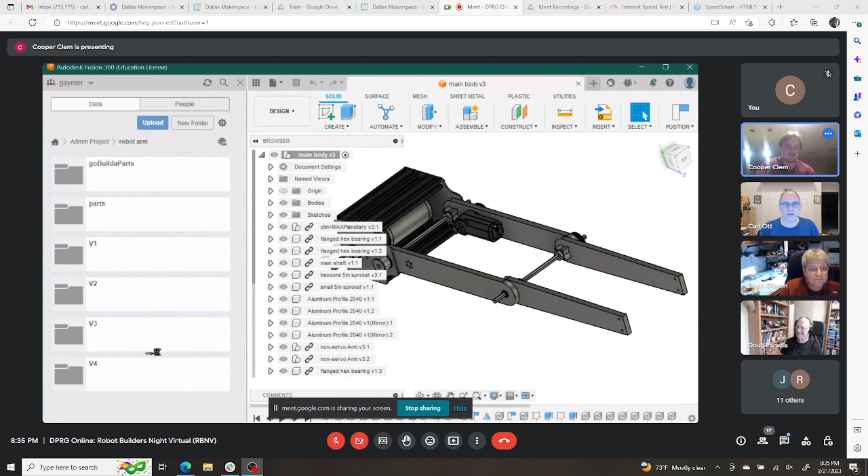So you haven't seen me in a while, or at least some of y'all haven't seen me in a while. Last time I presented independently from Iron Rain, I presented this, I think, or maybe it was the one before even. I've been working at this for a while. So basically just for...

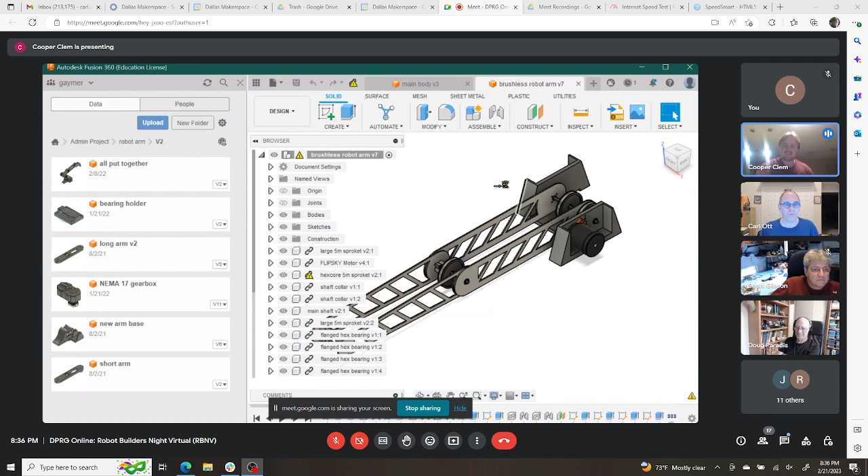God, as long as I've been into robotics, I wanted to make a robotic arm, something I could have at my desk as, I used to call it a research tool. Now I know it's just a toy. But it would be something I could use as a portfolio piece when trying to get into industry.

So I CADed up a bunch of different ideas for robotic arms. I started very basically with just these NEMA 17, throwaway motors that I got from somebody's old maker bot. That was before I learned about torque, and how you have to have so many teeth mesh with a toothed gear with belts, before there's slippage and whatnot.

In any case, I've tried at this a couple times. I can't say I've ever built one of these. It's always a matter of I get a really nice design going, and then the funding issue hits. Here, this is what I was trying to open earlier.

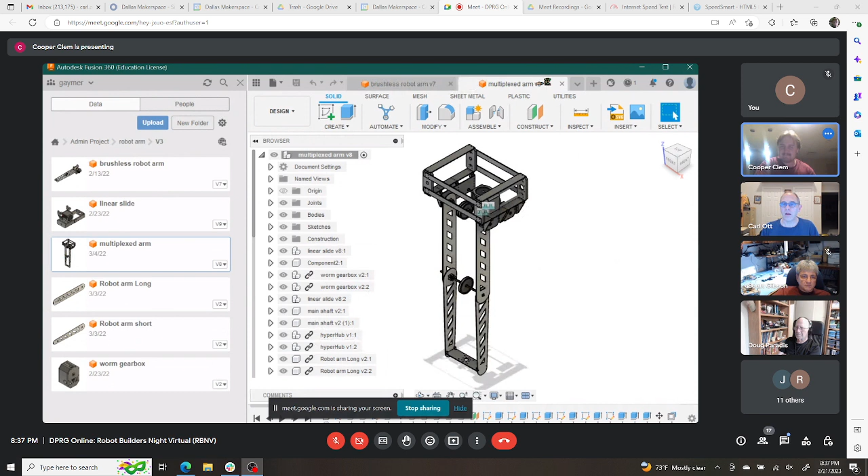So this was my design before my previous design. I'm not going to move ahead with it, just because I don't know if it really fits my goals with this type of project, but I'd like to briefly go over it because I think it's cool. So I was trying to design this one with cost effectiveness in mind, using mechanical multiplexing to reduce the number of motors I need for the arm.

I don't know if this is really particularly used in any other types of industrial robots. But in theory, you would have this linear slide with a NEMA 17 style motor controlling a linear actuator, or the barbershop pole kind of thing.

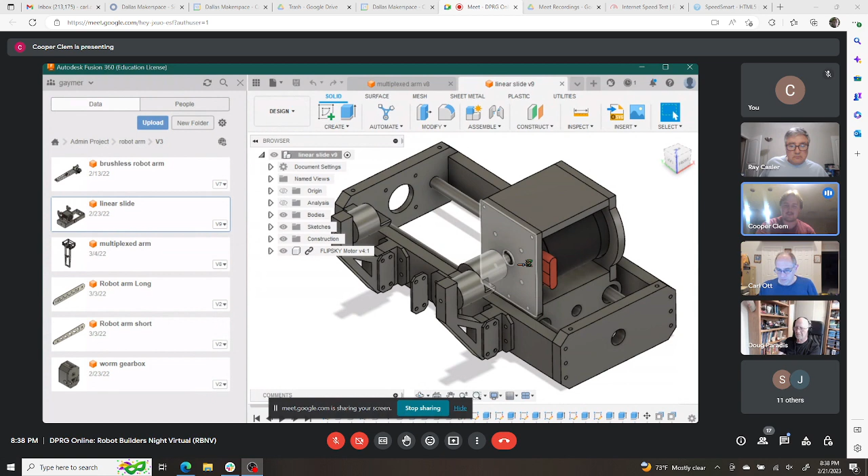It would push this like on a screw. It would push this whole thing back and forth, where it would interface with these little motor interfaces, and it would interface with this one brushless motor. So you'd only need one brushless motor to drive both segments, well, one brushless motor and the NEMA 17 motor.

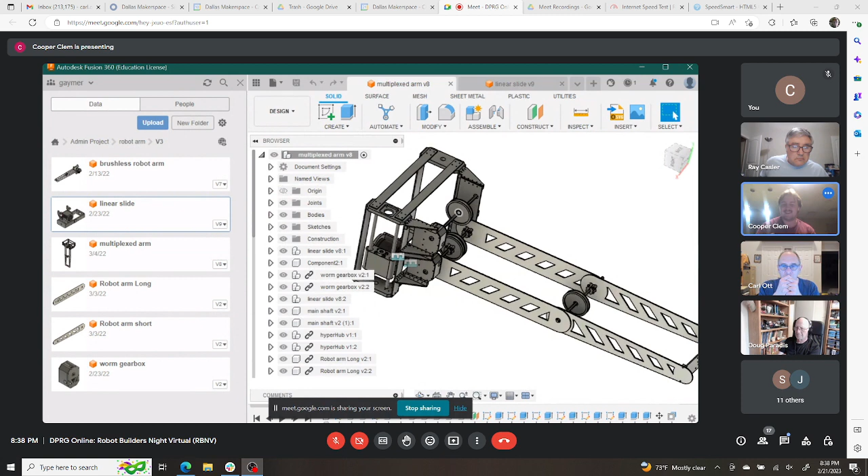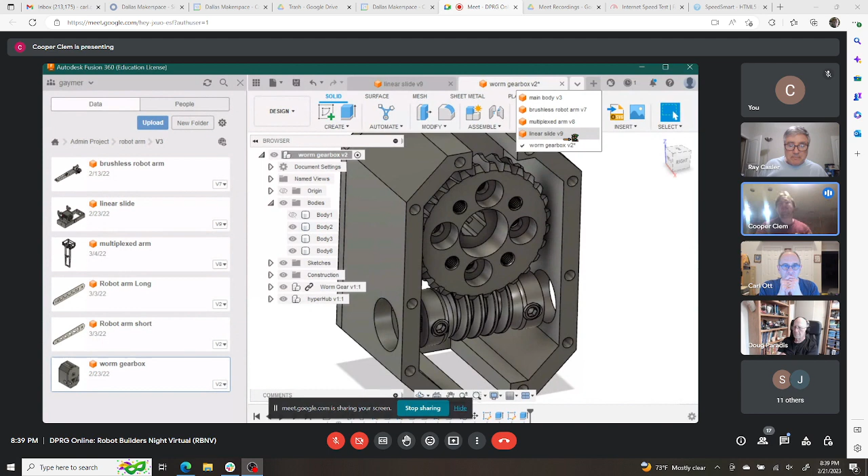Those would go into worm tooth gearboxes. If you have tension on something and you don't have it held by a worm and worm gear mechanism, it'd just fall down. But with this, since it's not back drivable, it would in theory keep up the entire body.

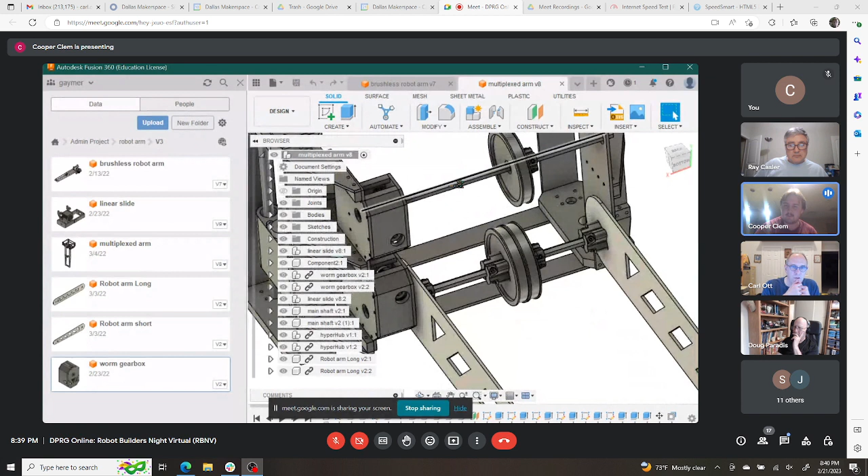The thought was this was all maybe 3/16 inch aluminum, and it would be using a bunch of off the shelf parts, like goBILDA stock axles. This was the part that I found maybe the most interesting about this design.

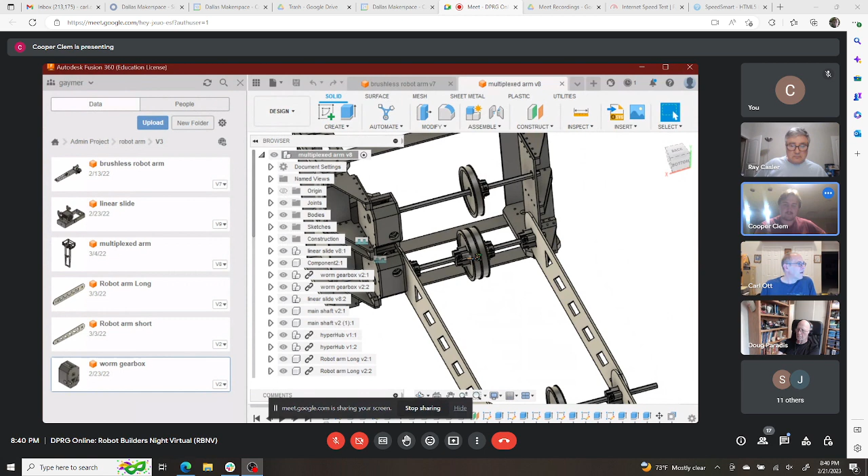I'm curious to see if anybody's tried this, with trying to save costs. This axis right here drives both segments, so the motor would interface with this gearbox, which directly went into this axle, which drove this first segment. This model's a little off, there shouldn't be these collets here, what are they called, shaft couplers?

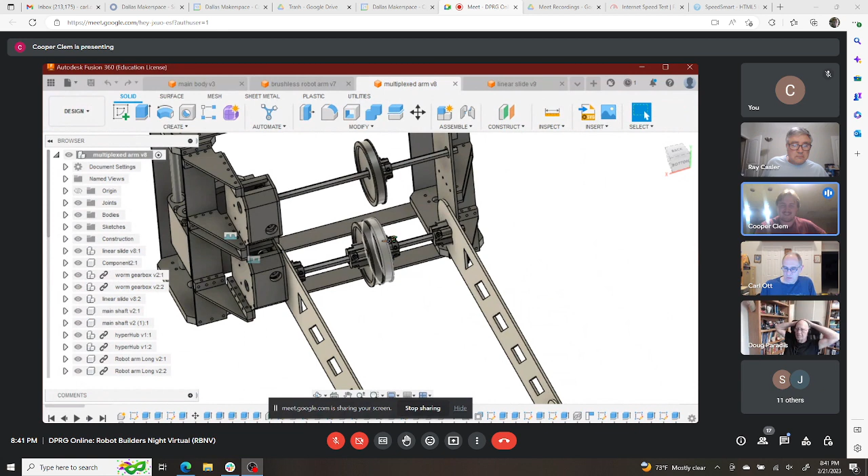There should be bearings in these, because the idea is that the motor would multiplex up to this other gearbox. This would drive this shaft. There would be a belt between this sprocket and this sprocket, and then these would be mechanically coupled such that there would be a belt that could run from there to there. So when you spun this, it would spin this, if that makes any sense.

Way back in the 1980s, Radio Shack came out with a toy robotic arm that had one motor in it and a whole bunch of gears. When you pressed the levers, it would move the gears around to engage different parts of the arm to move different parts, but there was only one motor in it. I think I've seen James Bruton recreate something like that, but I believe he used clutches. Or maybe it was multiplexed, but the multiplexer was just that lever, where you'd engage different gears based on the lever position. It's been a while since I saw that, but I know exactly what you're talking about, reminiscent of older toys.

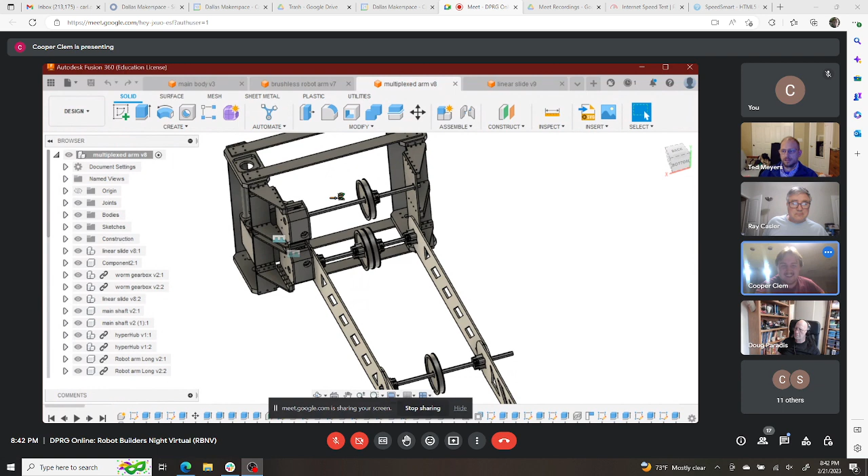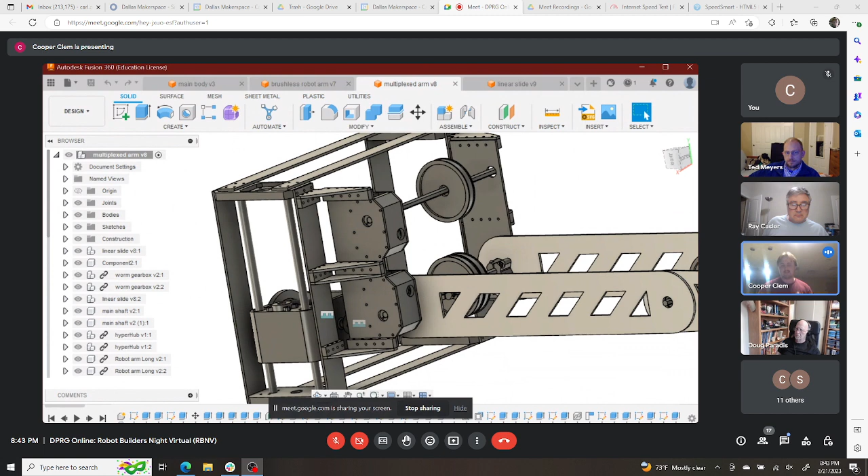This kind of looks, at least to me, like an Erector set a little bit. One of the things I was curious about, working on my modeling, is that I fall into the trap of using plate and just doing that whole thing, because in my mind I have a lot of experience modeling for 3D printers and CNCs, or 2.5D CNCs. But I don't quite know how to get out of that headspace when modeling for something like this. I had a really tough time figuring out how to connect these perpendicular plates that connected to the gearbox and the rest of the chassis.

Would anybody know how to achieve maybe a more, not organic, but something else? I understand this is maybe not the best design, but I couldn't picture another one.

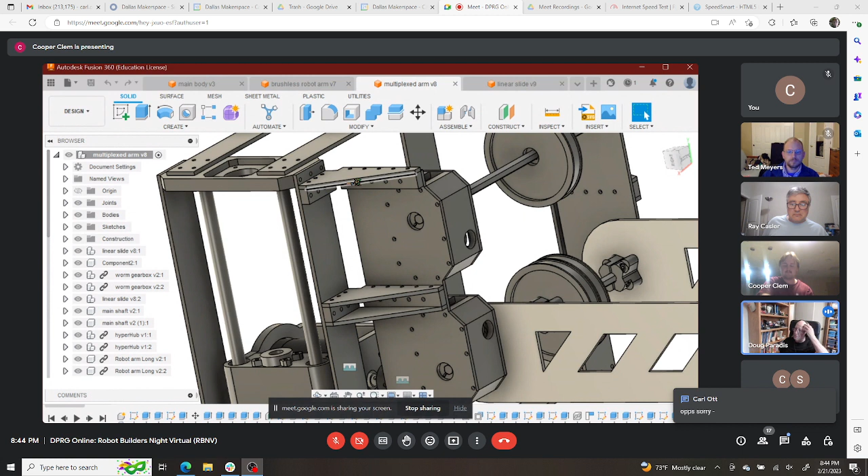Actually, I think your design's pretty good in that sense. Using plates is not a bad idea. To make it more organic, you can add some curves to it and some bevels and whatever. But if you were actually trying to make it inexpensively, you would want to do plates. Now, how do you create those combinations? Well, in the industry, one possible way they would do that is spot welding or something like that, and that's really not out of reach of the hobbyist. Weldments can be really cool. So that's one approach.

Eventually one of these days I will buckle down and get a welder and an angle grinder. But for right now, I was just working with Mr. V's CNC and my 3D printer at home.

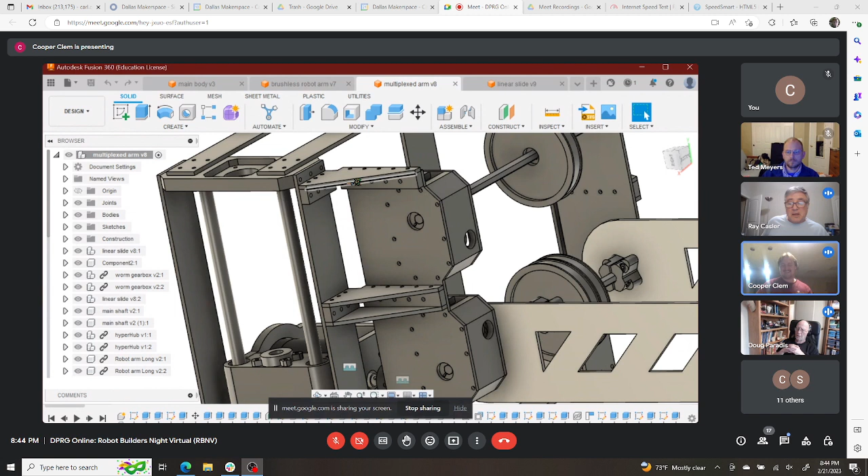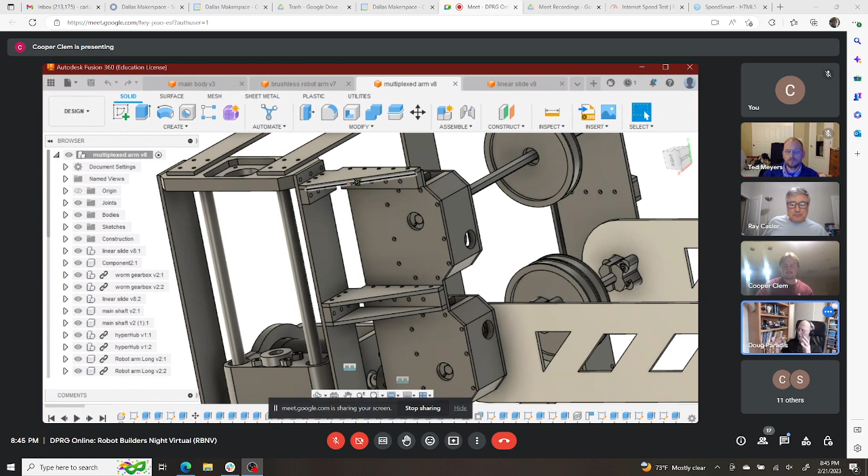The thing about welding though, especially if you're welding aluminum, you can put too much heat into it and warp pieces. So from a hobbyist point of view, the cheapest way to do this, if you're going to use aluminum, is to use that low temperature aluminum rod they have. It's a combination of zinc and aluminum or something, usually about 700 degrees. It's really like a brazing rod. You warm this up and let it flow into it, and it's stronger than the material.

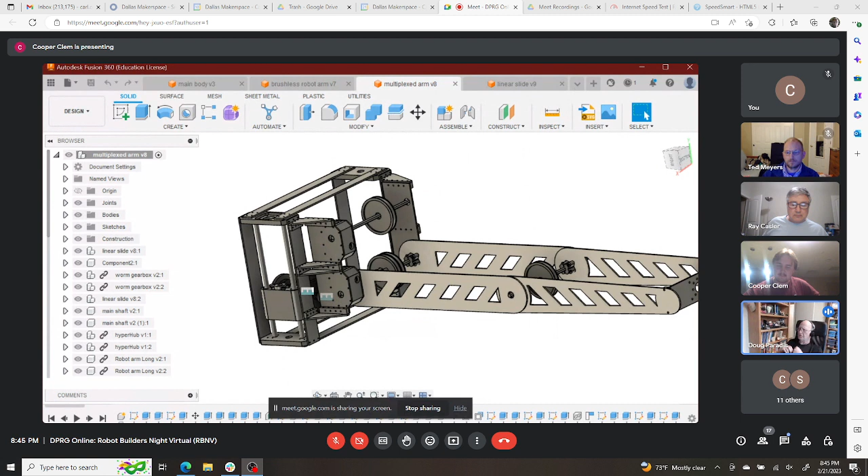I think you'd find it interesting. You might go take a look at, what do they call that? Sometimes they call it low temperature welding of aluminum, but it's not welding. It's really, like Ray said, a brazing process. It's also a soldering process, depending on how you want to call it.

What you do is you take your two pieces of metal and warm them up, and then you take your filler rod, and while it's warm, you let it flow. When it hits a certain temperature, it'll flow into the crack. You can go to Harbor Freight and get you a pack of them for $18, and you can probably do this on Amazon even cheaper, but you have to be careful with Amazon.

There's somewhere on YouTube, a person who has evaluated the various ones, and he actually liked one a lot better. He liked the Holbert brand of this low temperature aluminum, whatever you want to call it, brazing rod. But within his top three was Harbor Freight, which actually did surprisingly well with all of the tests.

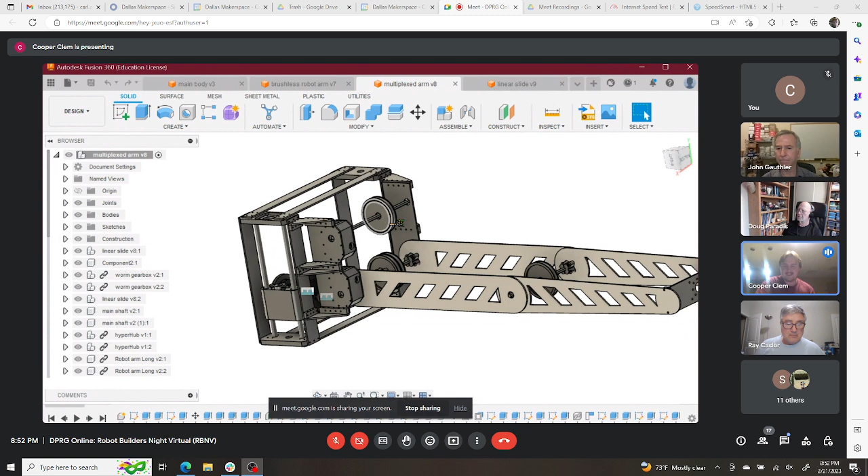I have a quick Fusion 360 related question. Looks like you're fairly experienced with Fusion 360 - what do you use to create your gears? Oh yeah, my gears - here they are just cylinders.

For the worm gearbox, I didn't CAD these. You downloaded models for those, right? Yeah, for these. However, I do create gears every once in a while, and there's this utility - I don't have it downloaded, but there's a pretty standard gear generator. Is it GF gear generator? Yeah, it's a little clunky, but I've found good use out of it when I do use it.

That's what I have. I was wondering if there was something better, because I have the same comment - it's a little clunky to use. I think there are probably some better extensions out there, but they might be commercial grade. I'm just surprised the basic Fusion 360 package doesn't come with a gear generator included. Right? Yeah, that's all I complain about with Fusion 360.

Is that a standard thing in SolidWorks? I don't know, I've never used SolidWorks. I see - I need to learn how to use that too.

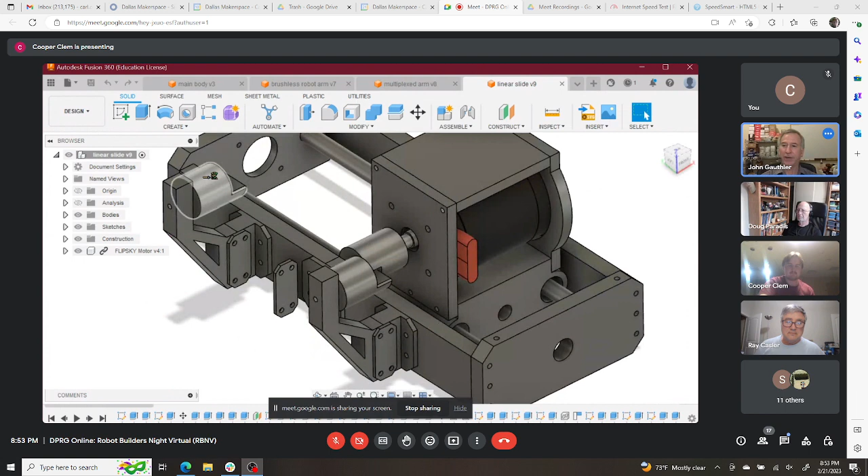I do have one other complaint about Fusion 360 - they give you the capability to generate threads, but if there's any size thread that's not included in their standard set, you can do a little editing on the XML file that specifies the threads. I've done it, I've generated different sizes of threads, but every time you upgrade Fusion 360, you have to go find the folder that XML file is in and manually move it to the new installed folders. Really? Huh, it's a pain in the ass. Yeah, I bet.

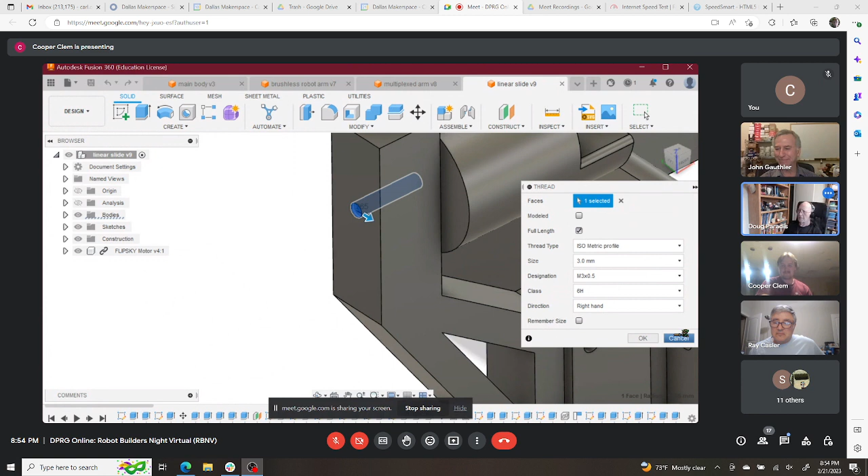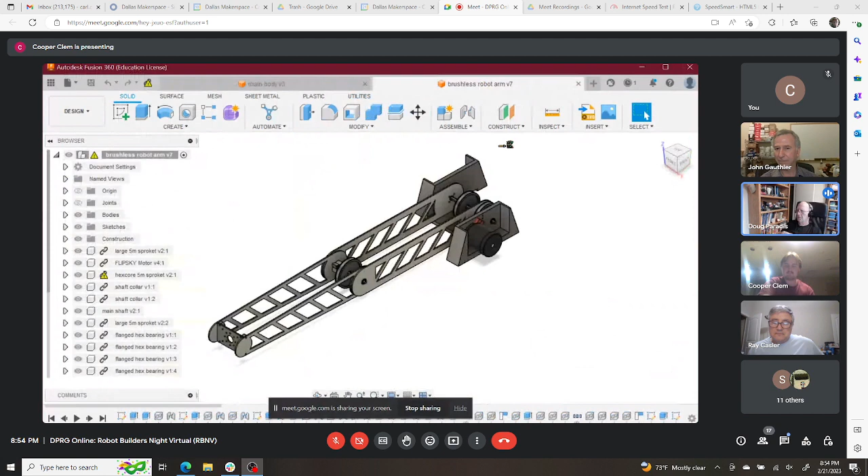I don't know, John, if this is of any interest, but if you were doing it on a 3D printer, there's OpenSCAD - there's a gear library that'll do any type of gear you want. You just specify what type of gear and the different sizes, and it will create a file suitable for 3D printing.

I'm not sure what other file formats it does, because I don't have any other way to make it. But I've still preferred something I can integrate into my model in Fusion 360 rather than just an STL file. Yeah, that would be useful for some circumstances. I'm sure there are probably independent gear generator programs that would generate a step file, but I don't know any off the top of my head.

Another source is RS - they're sort of like a European parts company, and almost every one of their vendors includes 3D step models of their parts if you want to download it. The same is true of McMaster-Carr - they have 3D models for every fastener they sell, and I've used McMaster-Carr's, imported their models into Fusion 360.

And then I guess I got one final thing just to wrap it up, because I've been going on for a little bit here. But this is kind of my newest design. Hopefully this will be the last one, as I've recently got a job that I think is going to actually allow me to fund this thing.

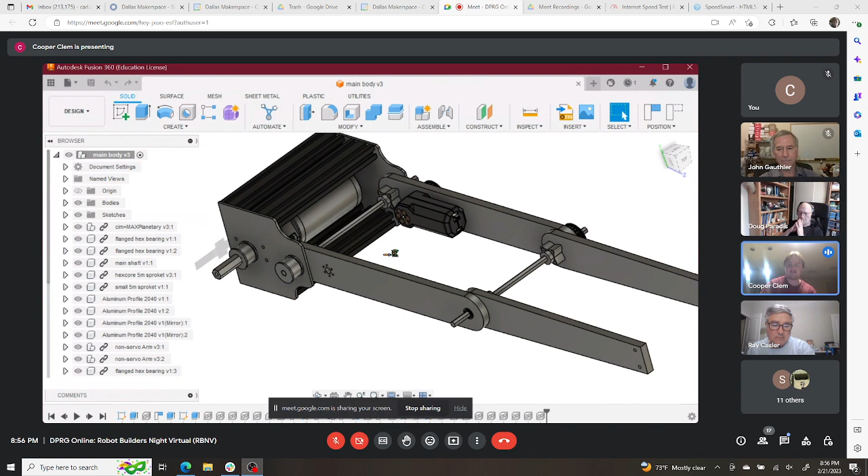I've already bought the motors, so that's usually the largest hiccup when doing all this kind of stuff. And the model's not finished, but it's kind of getting there. You can kind of see where I'm going with this. It's maybe a little bit more simple of a design. These are 3D printed parts, and I'm using just a motor on the actual thing, connected by belts and whatnot.

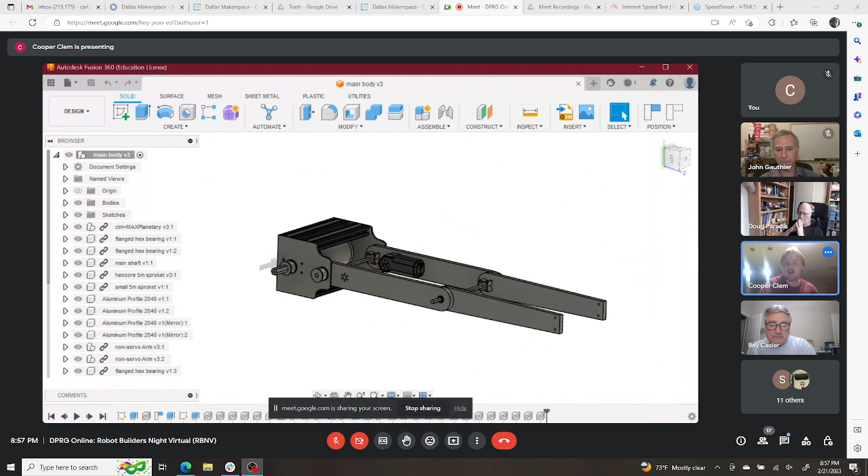The one thing I was going to ask was just that - so I guess I've got 2 questions. This whole thing, I hope to mount on my wall in this orientation where this side over here is mounted to the wall. Though I do hope to mount that on a linear kind of system in which I can move it back and forth, so the work envelope of the arm would be my whole desk.

Because the final goal for this arm - I've had problems with like, oh, what should I make it do, you know, whole 9 yards - the final goal for this arm is just to be a work light, a fancy work light. But the fact is it's going to be running off of, hopefully, a Raspberry Pi or a Rock, whatchamacallit, running ROS, whole 9 yards. Showing my capabilities rather. So it is still a portfolio piece.

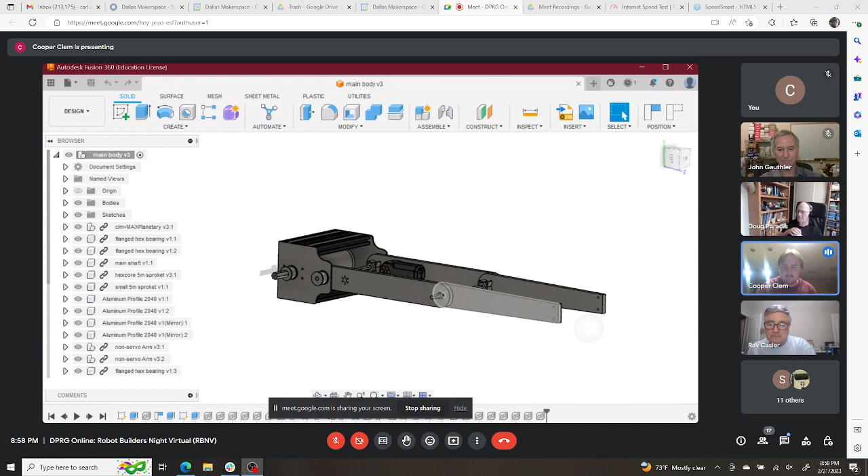However, I just can't for the life of me think of what a good linear stage for this would look like on the scales that it's going to be. For any context, I think that end to end, the full length of the arm is somewhere in the neighborhood of about 0.6 meters. And this thing's going to be pretty heavy, so I'm just not sure about how I should go about that linear carriage.

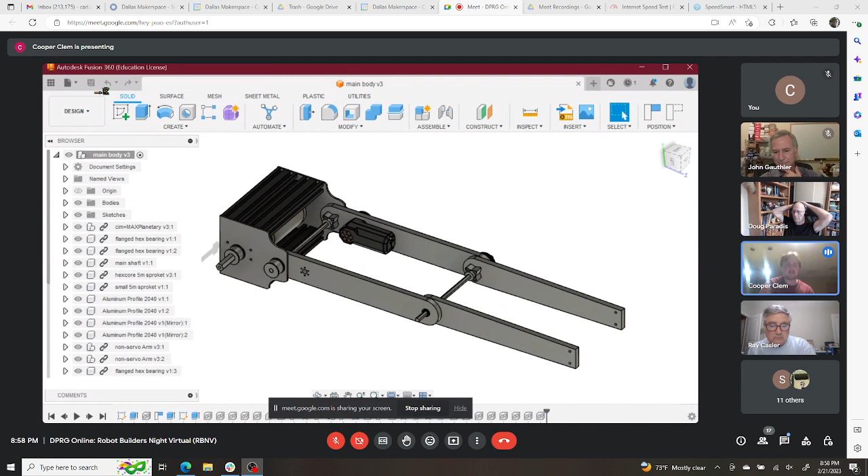And then the other question I had was just on this front end, and I haven't modeled this fully either. Its work envelope would be sufficient-ish if I just had it go from, on that linear carriage, one end to the other. But in the face of making it more complicated, I would really like to be able to do some nice inverse kinematic demonstrations on this thing.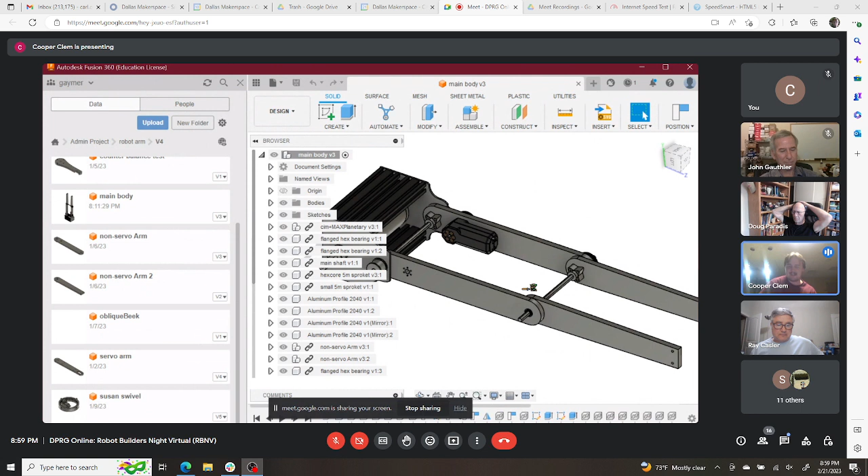For that, I kind of want a couple more axes to actually fully demonstrate that whole thing. And I was thinking, because a work light, I want to be able to point in any which way generally, right? I was thinking about for the ends, either using a parallel swivel joint or an oblique swivel joint, if anybody's got other suggestions. I don't know, I can't wrap my head around the oblique swivel joint, it's really its own beast.

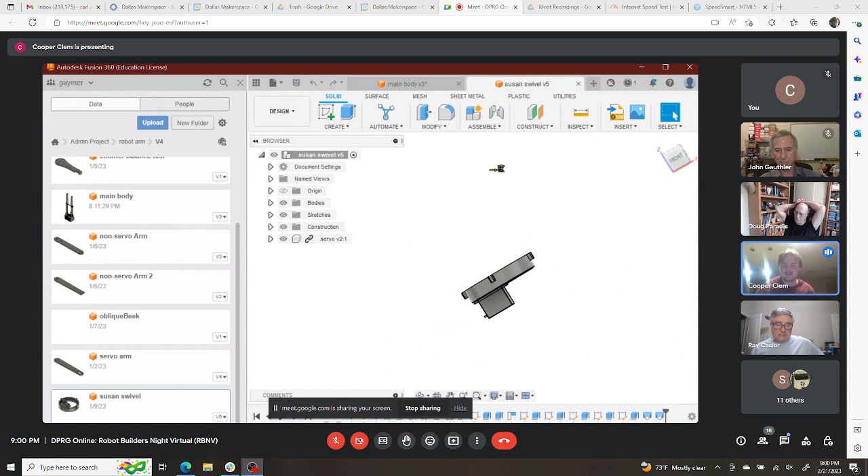This is just about as far as I've gotten - it's just a servo-based Lazy Susan kind of thing that's self-contained, so that in theory you could stack one like this and then another up here on this angle, and then they rotate, and that's that whole thing. But I just can't quite wrap my head around it. In any case, I'm just asking - is there any other kind of system that y'all might recommend that would be more effective at pivoting the end effector more simply, maybe?

Not that I would know. Probably Kareem would be the best person I can recommend. Fair enough, and you probably already talked to him about that. I actually haven't, I need to go back and talk with him.

Well, if you're going to do something really out there, you could do one of those snake robots, where you have a bunch of ball joints one on the other, and then a bunch of pulleys to different joints. Depending on how much you pull the cable, you can move it around like a snake arm.

Oh yeah, I think I've seen those. That would be different, interesting. Don't let anybody diss your design for being an overly complicated work light, that's just the fun of it. Sure, you can probably buy something off the shelf that does what you want, but it's the fun of building something unique. And if you do a nice enough job, it'll get shown on My Modern Met or one of those websites, Yanko Design, and then you can sell it for a couple thousand dollars.

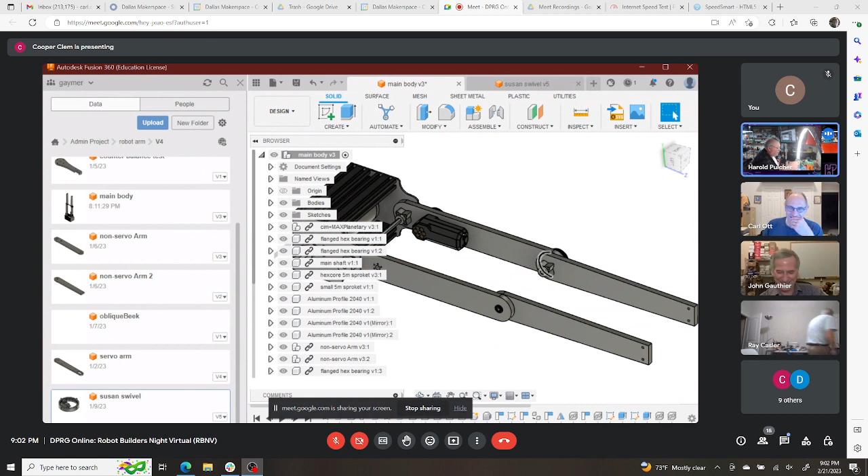On the worm and the worm gear, if the ratio is low, the worm gear can rotate the worm. So on these motors, as the worm turns, without much force I can still rotate the wheel there, and that's driving the worm backwards. So I don't know if you can see that or not, but I can rotate that wheel.

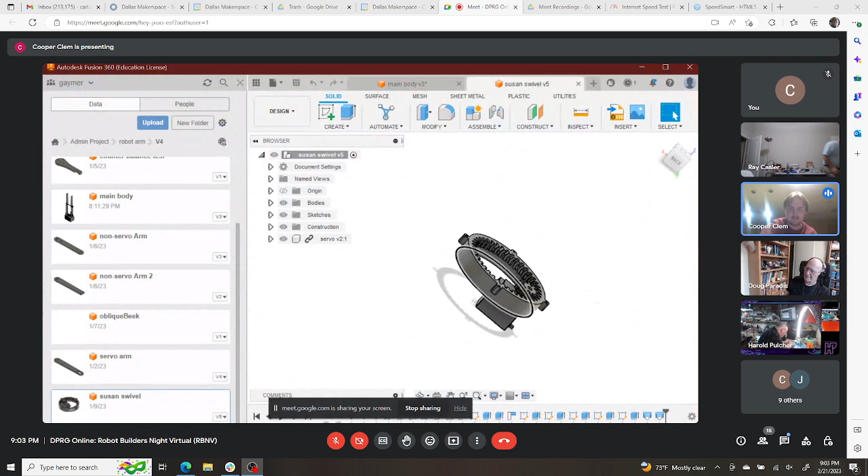Are you suggesting for that kind of lazy Susan joint I could use a worm gear in there? Well no, I'm just saying if the ratio of the worm and the worm gear is low, like in that case, I had a wheel mounted to this shaft. I can spin this and it actually drives the worm, or the motor shaft. You're saying gear ratios work both ways, right? Yeah, and if that ratio is low, it acts like a motor generator.

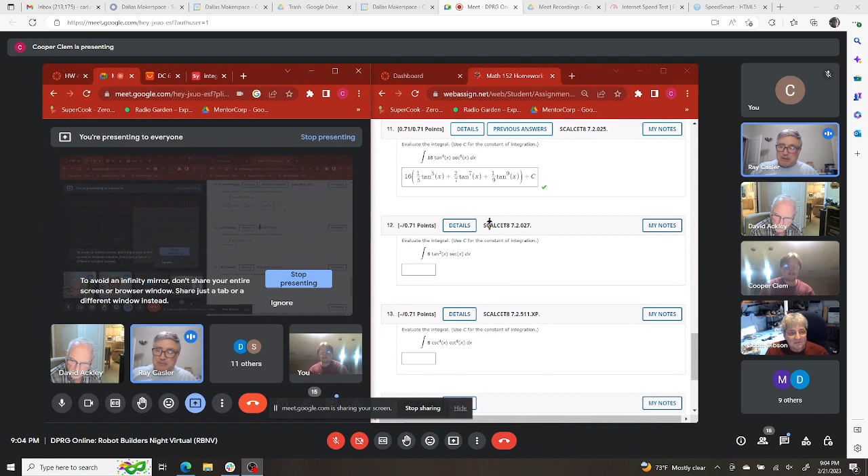Yeah, it's easier to push it, so you can basically spin the motor by spinning the wheel. But if you're using DC motors, whatever motor control you're using, you can put it in brake mode, or short the armature of the motor out, and it won't move very easily. What he's trying to do is use a worm gear reduction that will stay while he moves the motor to another worm gear. So in that case, use a high turns ratio or gear ratio so the friction of the worm gear is such that you can't reverse drive it. Yeah, if you have nice ball bearings on each shaft and everything's lubed up really well, it could push it or rotate it.

Well, thank y'all - you're giving me PTSD with that screen, by the way. Sorry about that, I was trying to get some work in while listening to the meeting. Yeah, it's been decades since I've looked at it, and it still gives me the heebie-jeebies.

But yeah, thank you for all the suggestions on that aluminum brazing. I'll definitely look into that, because that's something I think could benefit my toolkit amazingly.

Oh yes, Carl knows, I'm a collector of skills. People think I make things and make robots, no, that's my hobby - my hobby is really collecting skills, finding out how many different ways I can use different hammers to hit particular nails and all that good stuff. All that kind of stuff is great to know, allows you to have more interesting problems to solve. I think that's a good way to put it. More interesting problems, yeah, problems I want to solve versus problems I have to solve.

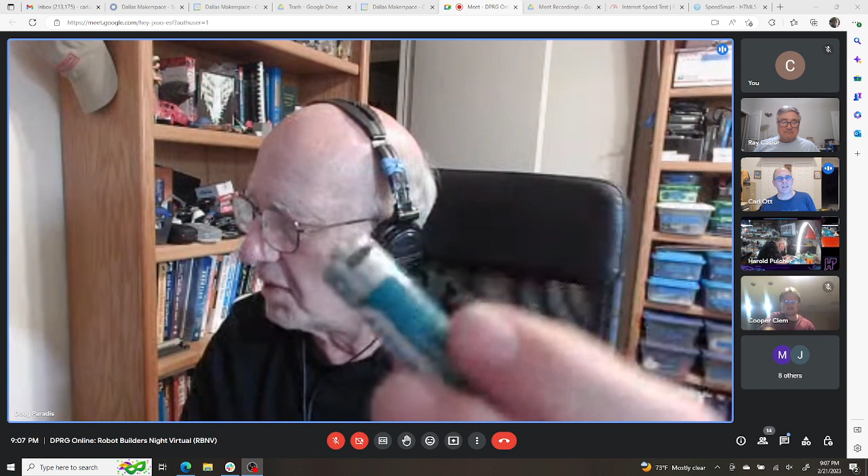Charging port. I think there's different styles, but I really ran these guys through the ringer, and it is a lithium battery, so you can do some stupid stuff. I mean, if you hit it with a hammer, it's probably not smart. Dumping it into the pool is probably not smart either. You could do that with an AA battery and it wouldn't be a problem, but drop these in there, I don't know what goes.

I shorted it. One of the things I did was short it, just to see what would happen. What happens is the protective circuit limits the current. What I was doing was thermal imaging, so I wanted to see if this thing would get so hot that it made a melted mess and destroyed itself. It did get up to 87 degrees Celsius, so not quite boiling water, but pretty hot.

Did you look at the output of that? I found those to be a little noisy. I haven't really checked that, but I did do the mAh curve on them.

At 100 milliamps, this one did 1955, which is 2000-ish. And at 250 milliamps, which I consider a heavy load for an AA battery, it actually did 1850 or so, 1870 I think. So what I'm saying is they're as good as a generic AA. If you went out and got Eveready or one of those super brand ones, or went down to Sam's and bought Amazon Basics or whatever, it's about as good as that. They claim it's 2600, but that's probably at a load of 1 milliamp or less—that's the only way you could get it up that high.

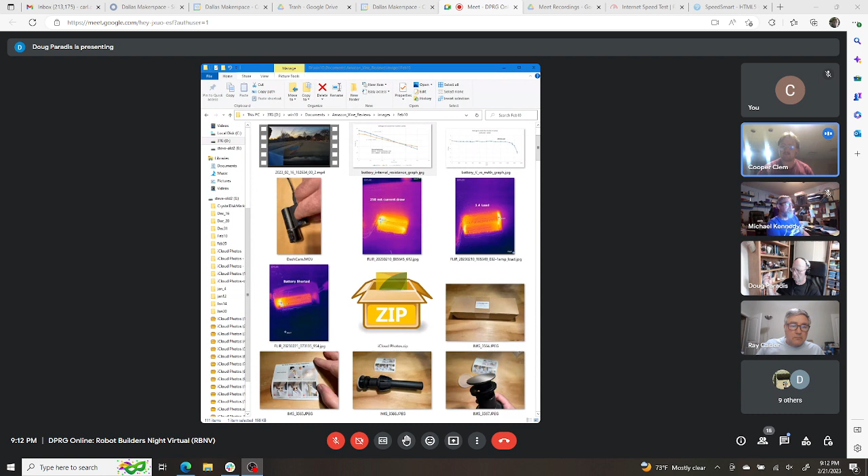A note on those ones that step up to 9 volts—that noise might be typical of the kind of pump or buck-boost converter circuitry you see most commonly. Just like y'all have probably used those little boards off of Amazon to boost voltages up. Since they're RC circuits, they aren't going to produce a very pretty DC voltage, but it's roughly... I don't know why it's...

You see it now? Nope. Okay, anyway, believe me, it's a nice flat curve out to about 1600, and then it peters out.

Hey Doug, do you know which lithium chemistry it is? No, I don't know. It was real interesting to watch the protective circuit go. When I put it on there in the short, I was also measuring the current, so I guess you could argue it's not exactly a dead short because it went through the volt meter and the amp meter. Initially it was 3.5 amps, and then the protective circuit, as it heated up, quickly popped in and it would go down to a very low value. Then I guess it would time out and release itself, and it would pop back up, go back down, pop up. It was bouncing all over the place. Anyway, it was kind of cool.

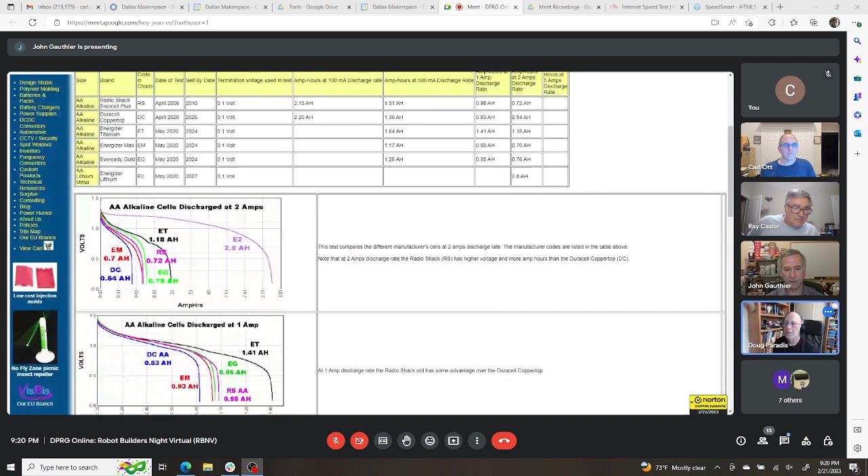So as they're saying, the alkaline batteries, the best performing one that they tested was 1180 milliamp hours. But 2 amps is 2 amps. You see where he shows them coming out at 1.25 and then dropping. See, I cut mine off at 1 volt. So when the cell goes to 1 volt, I say it's bad. So go back to 1 volt on that graph, and you can see that's where it is. So you're talking 0.3, so that's very short.

Now if you slide down, you can see that he goes to 500. Go down, I think he goes down to 200 and 100. Let's see. Okay, so that is what I would... that's a reasonable graph. Yeah, that's 100 probably milliamps, realistic. Yeah, 100 milliamps, he's dropping down.

Now you got to come back to the 1 volt range because he's letting them go a little bit further. And you can see that's 1.8, and one of them looks like he's right at 2.1. So that is probably what I would consider normal for the problem when you go up to, it's the internal resistance of the thing.

If you go to 500, let me see if I can find that. Yeah, well, 1 amp is a lot to ask of a AA battery. Yeah, right, yeah, and that's why I said...

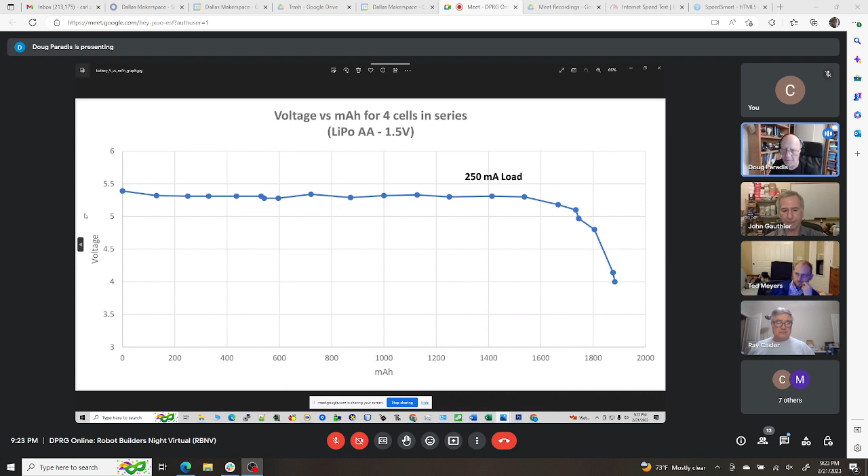All right, so here's what I saw at 250. Now, you got to remember, this is 4 cells together, so 4 volts is where I cut it off. All right, so that's what he's doing at 250. And I gave you the values at 1 cell, which were at 1 volt, and there are like 1950 to 1975. And this is why I don't believe kind of their stuff.

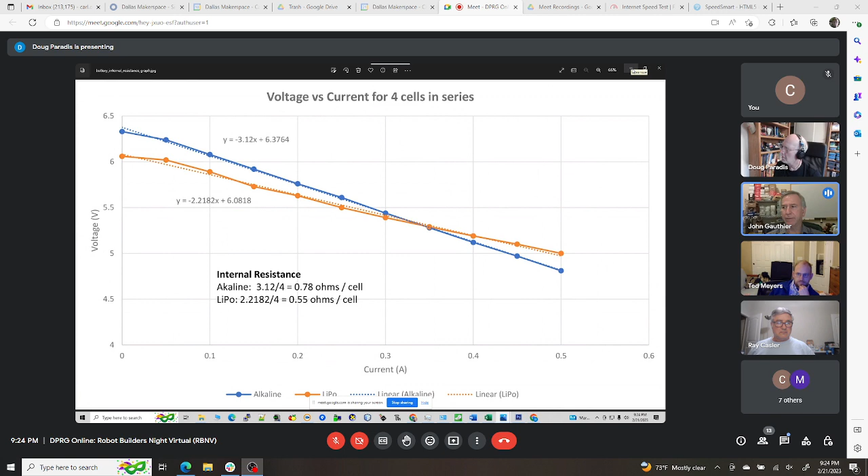Yeah, I have read a couple of articles that claim that most, especially most lithium-ion battery manufacturers, wildly exaggerate their capacity. Oh yeah, this guy, the guy I bought these from, he's saying 2,600. And like I say, the only way I could get 2,600 on this thing is probably, is like, a half a milliamp coming off of it, where a constant load of 0.5 milliamp or something like that. That's the only way I think you could get it up even close to that value.

And it's probably the absence of a standard that everybody follows for what is your rating at a specified current. Well, and the other thing is they degrade over time and use, so once you start using them, you lose capacity. Yeah, well, I mean, I'm talking about a brand new battery out of the box. They're exaggerating their capacity. Yeah.

This, I would think, at least at this point, is very similar. Since I'm using a cutoff voltage of 4 or 1 per cell, if I took it down to 0, I could add a little bit more to it. But what I'm saying is that's 100 milliamps. That's reasonable. That's kind of like what you would expect for normal use out of an AA battery, 100 milliamps or less. You know what I'm saying?

Yeah, Carl, didn't you kind of steampunk one of the club robots? I started down that path. That's where this color scheme came from. But then I told my one artsy cousin about it, and he helped with some website stuff. Next thing I know, he sent this care package, and he had a kit where I could gold leaf and brass leaf. Basically, it's super thin metal, and you put glue down and electrostatic charge just sucks it up to the glue, and then you press it down, and pretty soon you've got it.

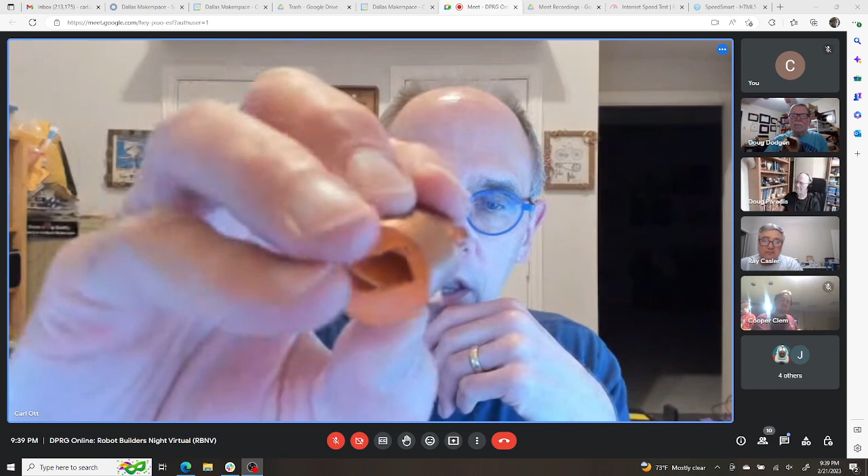Actually, I have a sample here, I can show you, I did a trial piece. Looks like tarnished gold or brass. Yeah, here it is. Look at that. This was meant to be the power thing you plug into a cigarette lighter in a car. So this was a sample, I 3D printed it out of plastic and then put brass leaf on it. So it's not very expensive at all, but you can very quickly get a very cool looking metallic feel to things with this approach.

I'll definitely take a look at that. Yeah, so I can send you more information on that for sure.

I meant to do this to that robot I just picked up a minute ago, and life gets in the way, right? Yeah, I don't see Pat on the call. He may have left early. My other interest is astronomy, and they have their meeting on the third Tuesday of each month, so I have to miss this one. Oh no! We just got back, but I forget where I was going with that.

Oh, Pat, in his honor, I'm going to be making the body of my robot probably out of plywood, and so I'll need to cover it with that leaf stuff, possibly. Yeah, that'd be cool. A gold robot, sort of gold brass, with a dog-like head. You can get that leafing material in all kinds of metals, nickel, brass, copper, gold, silver. For the finer ornaments too, there's also brass colored 3D printed filament.

Right. Someday I may have to take up 3D printing. So many hobbies, hobbies, so little time.